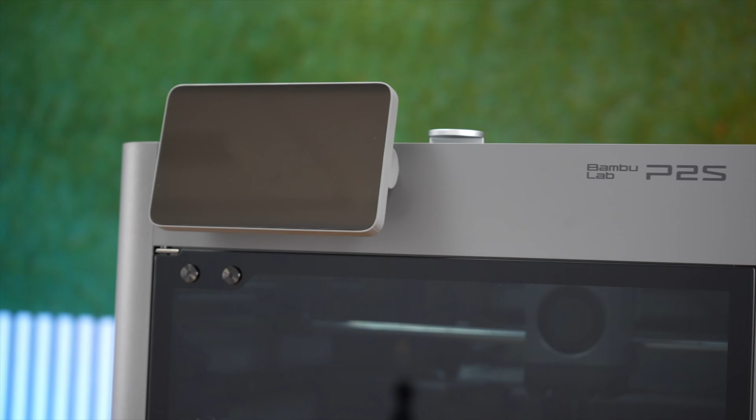In this guide, I will show you how to install it easily in your Bambu P2S in just a few simple steps. What are we going to do? The plan is simple. We prep the P2S and access the hotend. We do one extra step to make your P2S printer compatible with both 1.75mm and 2.20mm simultaneously. We mount the new Recreus hotend.

We tweak 3 settings in Bambu Studio or just use our ready-made profiles. First print with flex, easy.

Why does Filaflex 2.20mm work? With flexibles, it's not the temperature that kills the print, it's that the filament buckles, compresses, and loses its push. With 2.20, you have more column strength, more extrusion stability, and the filament reaches the hotend without twisting or clogging. Result: you can print flex faster, with fewer failures, even with very soft, low-shore materials.

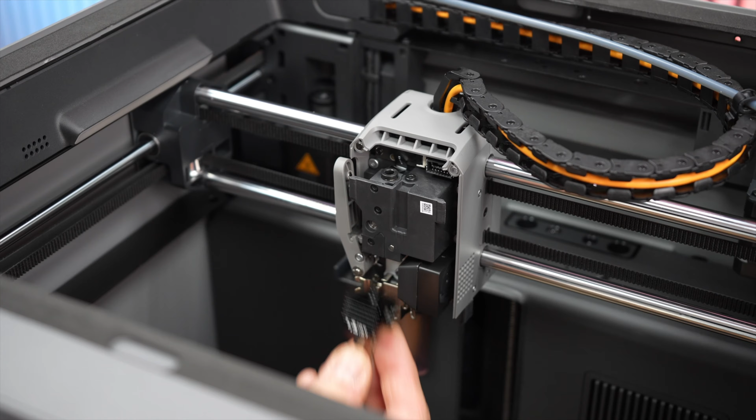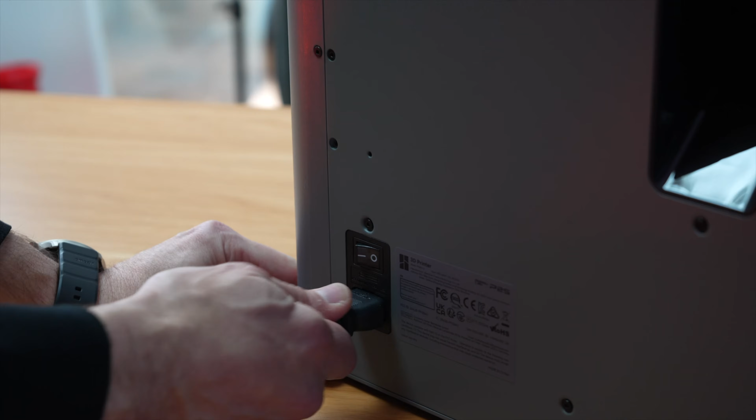Safety. In this tutorial, we are not modifying the firmware or touching the machine's electronics. We are going to change the hotend, and it will be necessary to widen the filament path to have simultaneous compatibility for 2.2mm and 1.75mm. For safety, unplug the printer. Make sure it is completely cold and work calmly with the right tools and a well-lit area.

Keep in mind that any modification may affect the manufacturer's official warranty. If you decide to continue, you do so at your own risk. Take your time, don't force anything, and if you have any doubts, contact us at Recreus.com.

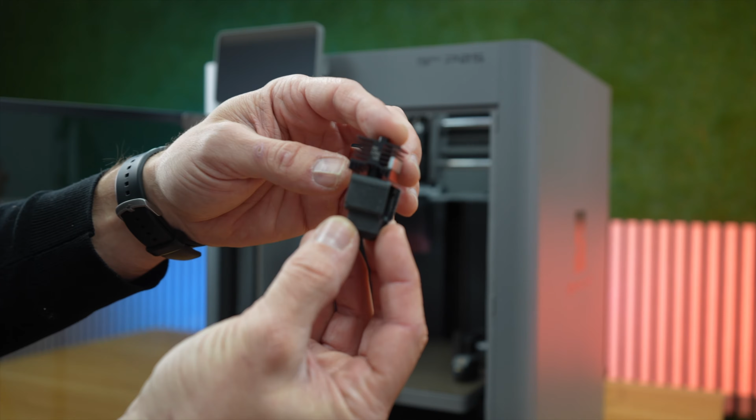Tools. What do you need? Let's get the tools ready. For this update, you only need the Recreus 2.20mm kit for P2S. This includes the 2.20mm hotend ready to use and a manual hand drill that will allow us to enlarge the filament path. The time: approximately 5 minutes the first time.

Installing the 2.20mm hotend on P2S step by step. The installation and the hotend swap is the same as the official Bambu Lab guide for the P2S model, so that part won't change. Even so, let's go through the process. Step 1. Unload the filament. If your printer has any filament loaded, unload it so you can remove the hotend.

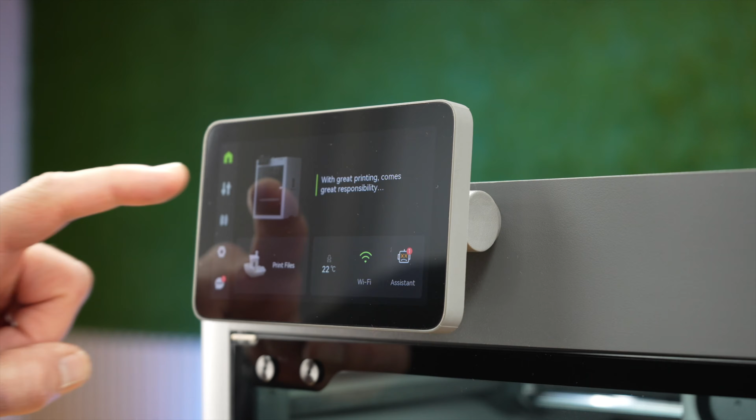Step 2. Lower the bed. First, and before turning off your 3D printer, lower the bed all the way down. This way, you can work comfortably with enough space. Step 3. Power off, disconnect, and remove the top glass. Turn off the printer at the back switch. Disconnect the power cable and remove the top glass cover to have free access from above.

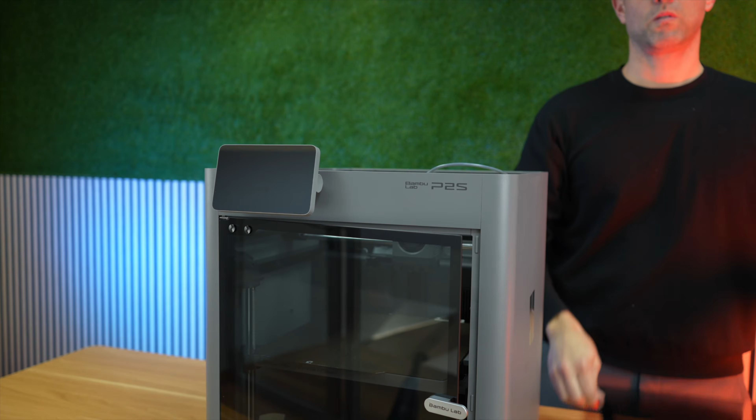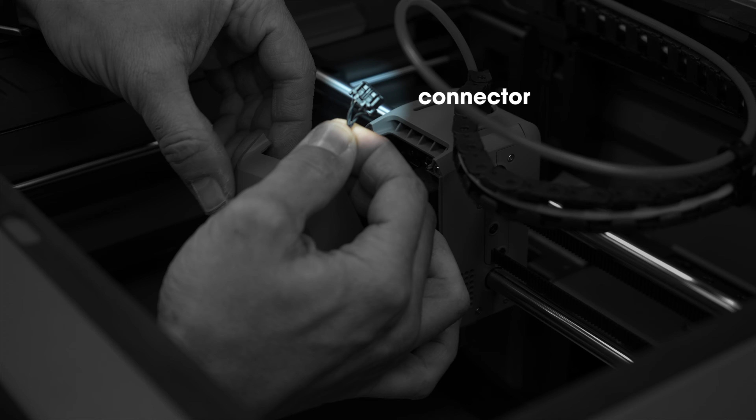Step 4. Remove the PTFE feed tube. Remove the PTFE Teflon feed tube from the extruder by pressing the coupler that releases the tube. Step 5. Remove the front cover and disconnect the fan. The extruder's front cover is magnetic. Remove it. Heads-up here: the part cooling fan is attached, so unplug its connectors without pulling on the wires.

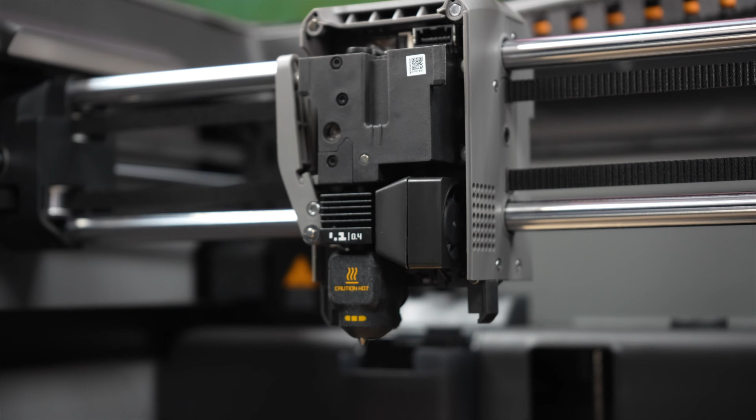Step 6. Remove the hotend. At this point, with the 3D printer cold, you can now remove the silicone sock protecting the hotend. Open the clamp holding the hotend in this position and remove the hotend from your printer.

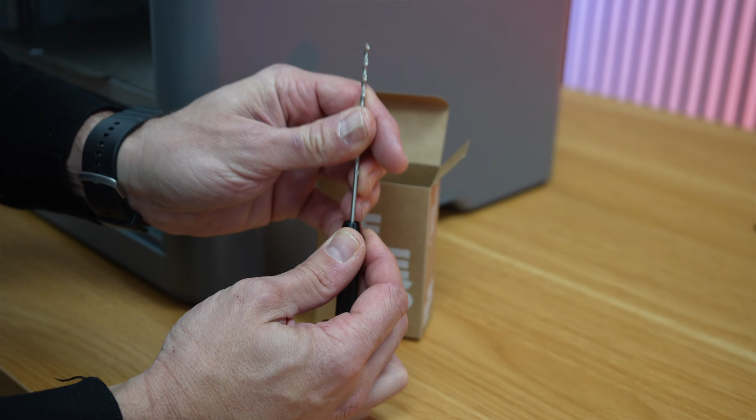Step 7. Enlarge the filament path. This is a step we only do the first time we make our printer compatible with the 2.20mm system. This is the way we can use 1.75 and 2.20mm filaments simultaneously. To do this, assemble the tool included in the 2.20 hotend pack. Leave the drill sticking out as much as possible. Don't insert it all the way into the handle. This will give you more clearance to work.

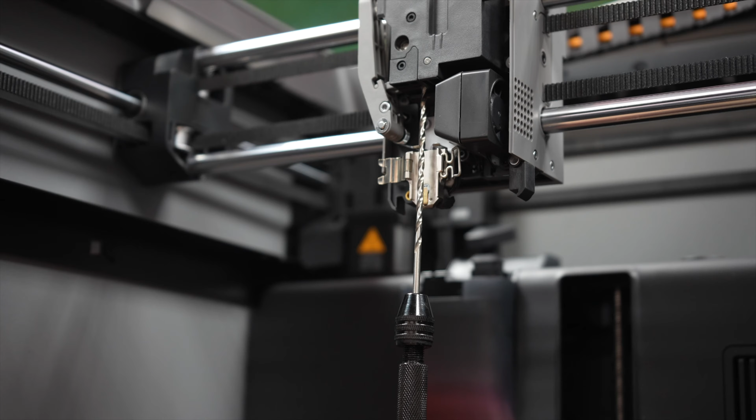Insert it as vertically as possible from below and twist very gently. It will cut its own path. You don't need to apply force. Keep going until you feel it reach the extruder gears. This is our signal to stop and remove the tool.

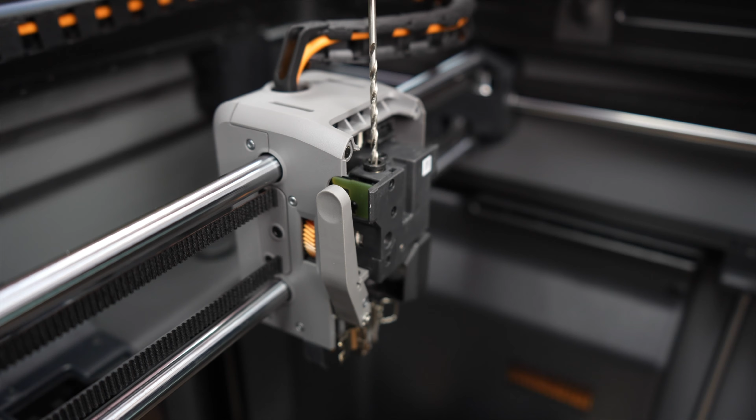Repeat the operation from the top side. Again, as vertically as possible and twist very gently. It will cut its own path, no force needed. And watch this: when you reach the gears, you will see movement on the side.

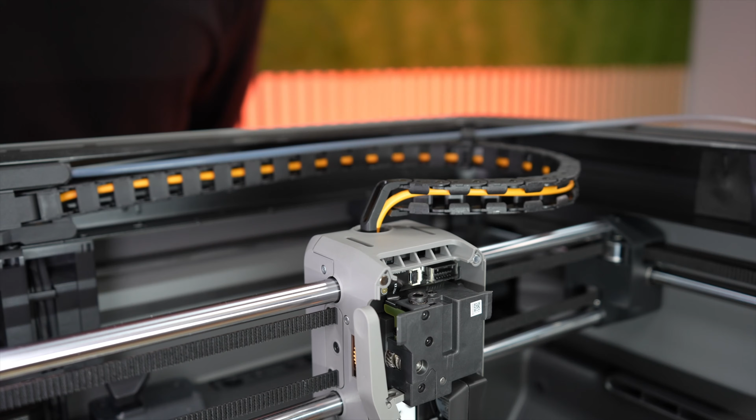Now the internal channel is ready for 2.20 and 1.75 compatibility. You can put the tool away, you won't need to use it again. Step 8. Cleaning the extruder channel. Before mounting the new Hotend, blow it out or just use a blower to remove any internal debris or shavings. Clean the build plate as well.

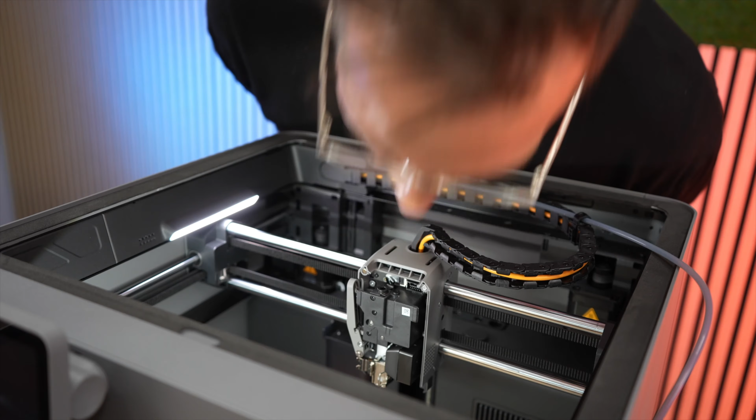Step 9. Place the new Hotend. Here, the process is the standard again. Place the new Hotend, fix it in its correct position and make sure it is secure. And put the silicone sock back on the Hotend.

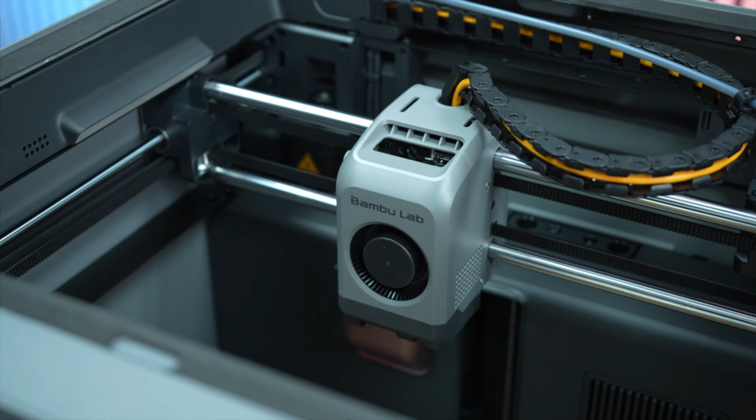Step 10. Mount the cover and connect the fan. We remount the cover, reconnect the fan, and leave everything as it was. Step 11. Short PTFE tube. We place a short piece of Teflon PTFE tube on the top of the extruder and feed the flexible filament.

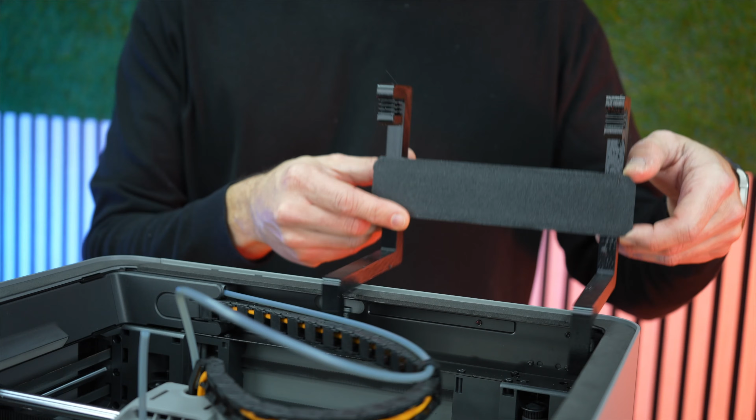Step 12. Load, power on and purge. Turn on your 3D printer. To load the filament, we can use the side dryer option for the spool.

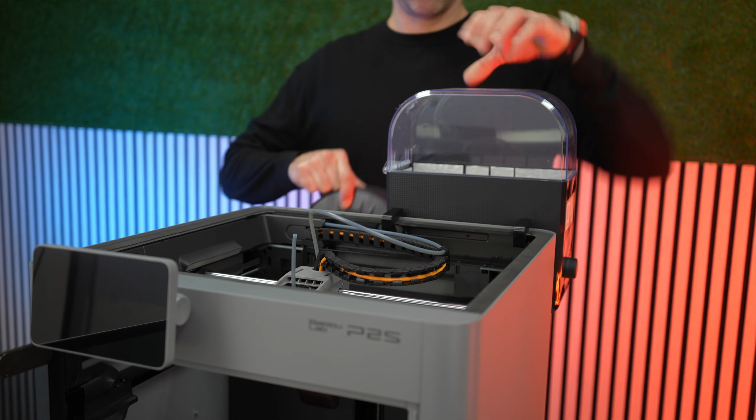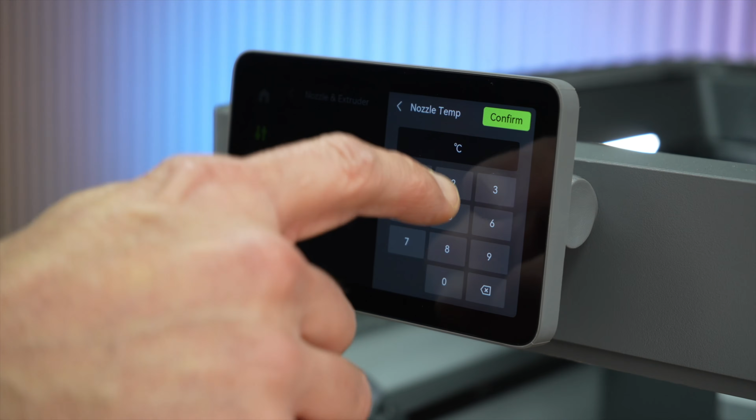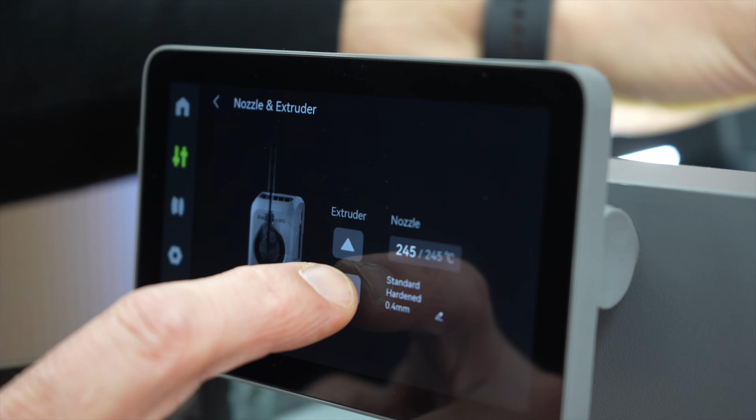We load the 2.20mm filament. In this case, I recommend pushing the filament manually. Go to the control tab, heat up the nozzle to 245 degrees Celsius. And push down by clicking the extruder controls. This way, we do a purge and ensure a clean path. If your purge flows continually, you are already 90% of the way to success.

Slicer, Bambu Studio. Just 3 changes and we have our printer ready. Now it's time to change the slicing configuration. Here, we give you 2 options. You can download our profiles ready to print, or if you prefer to do it yourself, I will tell you the basic changes you need to make to dive fully into printing 2.20mm flexible.

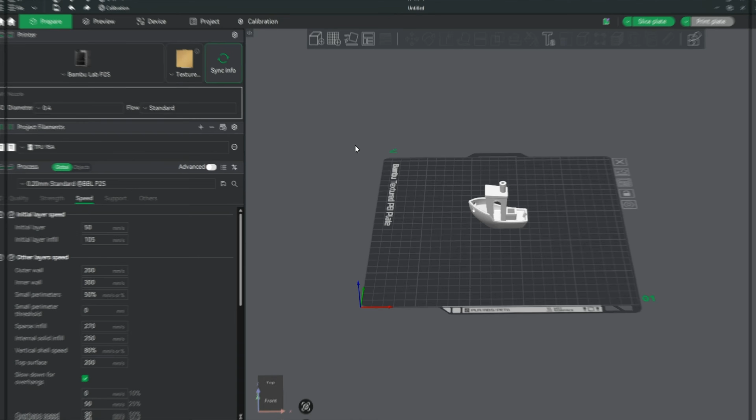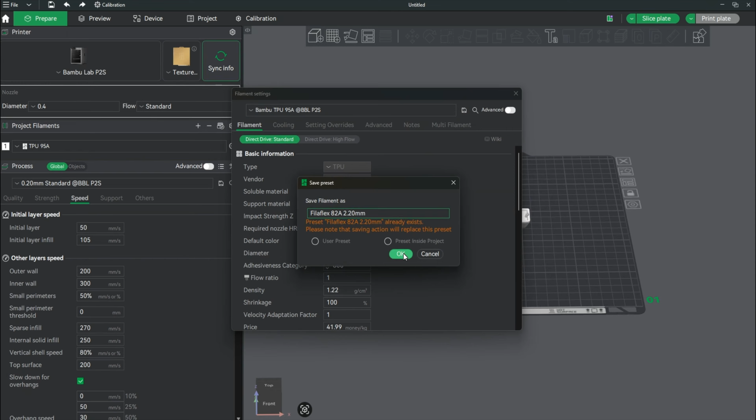Now we are here in Bambu Studio and we are going to set up the P2S material settings. The first thing is to select a preset material, for example TPU 95, and then click to edit the material. The first thing we are going to do is set up the name: Filaflex 82A 2.20mm. Okay, we have already done that, and we are going to change the diameter to 2.18 because our material is between 2.20 and 2.18.

And then we are going to move to recommended nozzle temperature and increase that to 265, because at the first time of any print, the purge temperature can increase to 265 and it's easier to flow the material at this temperature. Then we are going to move to the print temperature and we are going to increase this one to 245 and the other layers to 255. We leave the build plate temperature as it is.

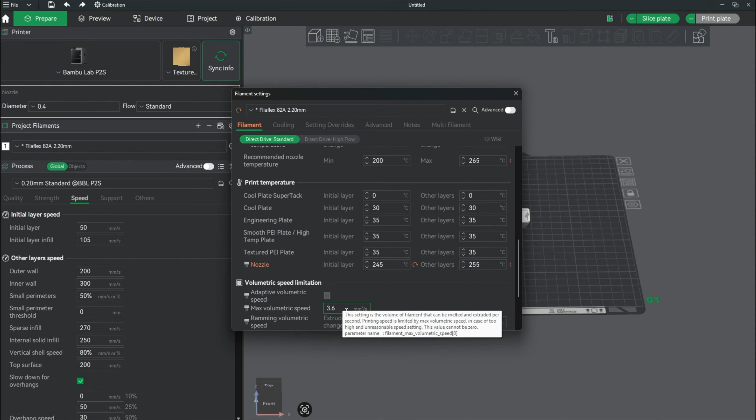And then we are going to go to the maximum volumetric speed, my favorite part, and we are going to increase to 14 millimeters. We can even go to 16 if we increase the temperature. Okay, the filament part is already done, and we are going to save.

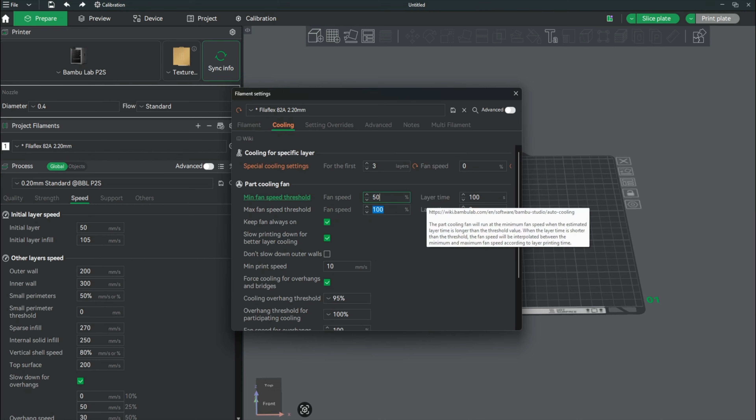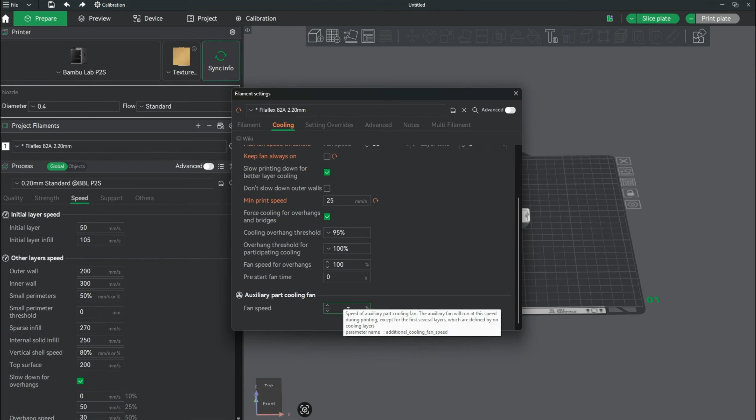We are going to the cooling settings, and the first thing is that we are going to set up the first 3 layers to 0. Okay. Then we are going to reduce this to 50% and this parameter to 80%. Okay, we remove that, we slow and we increase this parameter to 25 millimeters. And we'll reduce the fan speed to 30. And now we save it again and go to the setting overrides.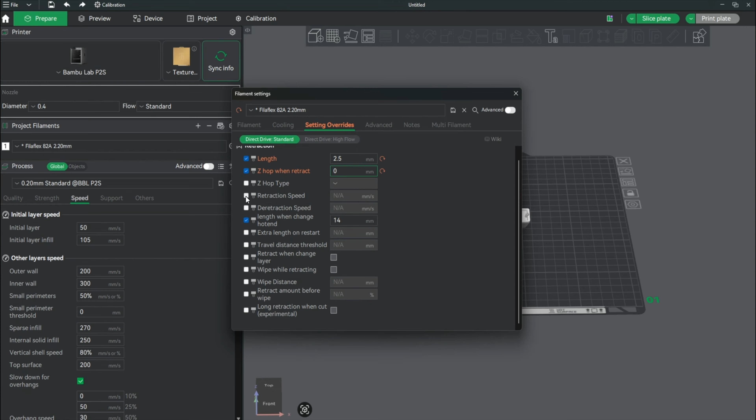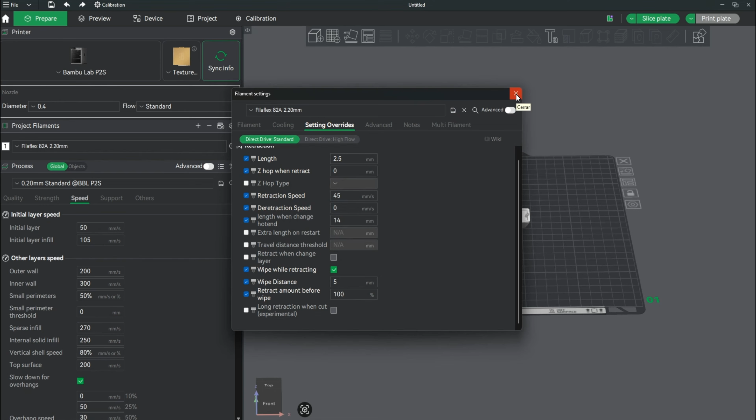We are going to increase the retraction length to 2.5. We'll set Z hop to 0 to avoid stringing. Retraction speed we increase to 45, and we are going to select wipe while retracting, distance to 5 and amount to 100%. And now we have our print settings ready. Okay, saved, and we can keep all the other parameters as they are.